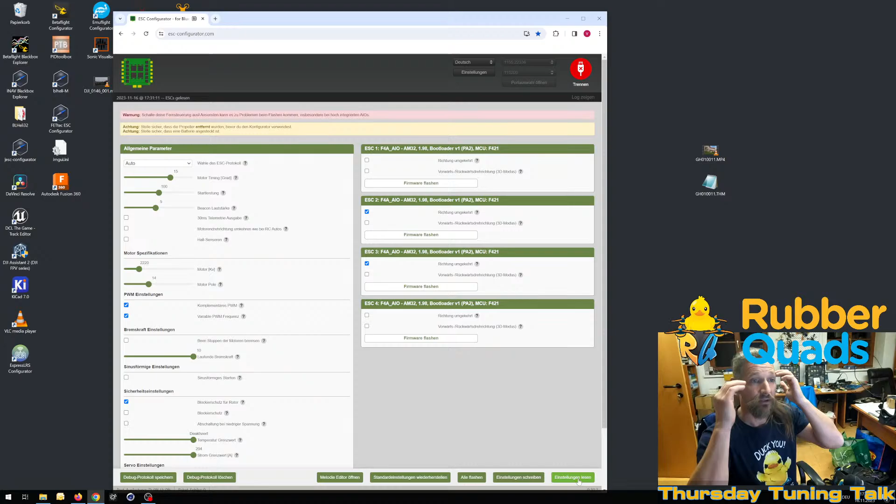I'll do one for BlueJay as well. So, it's a bit behind, but it's working. So, never change a running system. Okay.

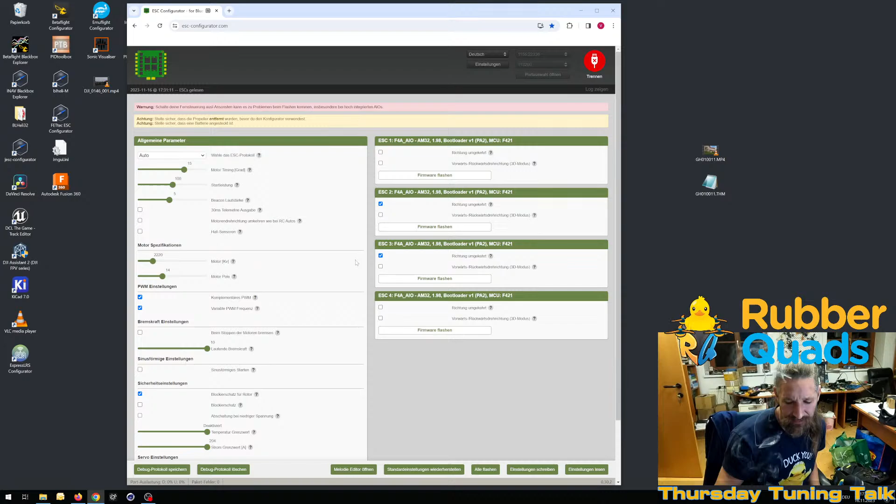Chris, since you're here, can I change the language on the fly? Because it's German. It's obviously reading my system language, and no one wants German parameters, and I don't want to mistranslate. If Chris is still here, yeah, he is. Guide me. Oh, over here. Sorry, I'm blind. Missing the obvious. So it's English. Okay.

So what do we have here? We just do a quick run over ESC protocol. We all use DShot. We could nail it to DShot, but we don't have to. It's so fast to init the DShot. Timing advance. First and foremost, this is how much earlier. No, later. Chris, timing advance is later, as far as I'm aware. Okay. No one knows better.

But I think with cars, the ignition timing is going to the negative if it's an advance, and it's going to the positive if it's a delay. Chris, please enlighten me. Because Style Sucks is in the chat, he did it. Wrong at once. Yeah, but I say it's a pity we don't have Alka or Daniel here. They certainly know better than we all do, because higher timing would mean we're powering the coils earlier.

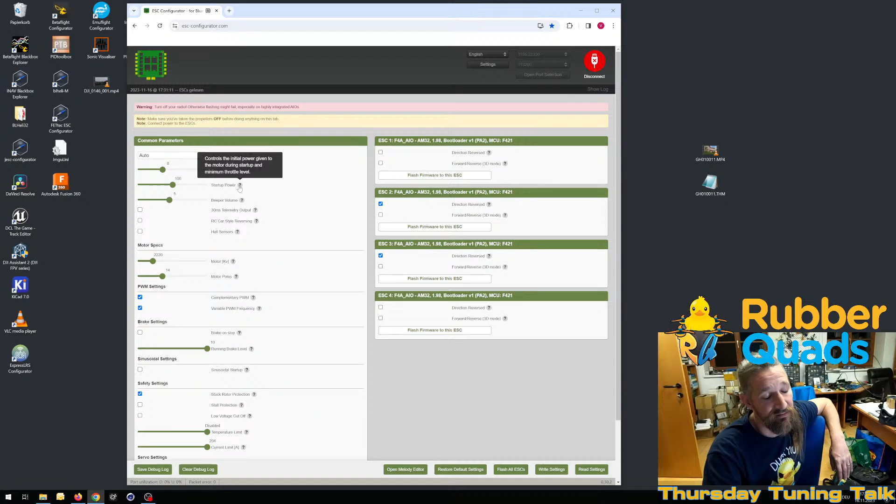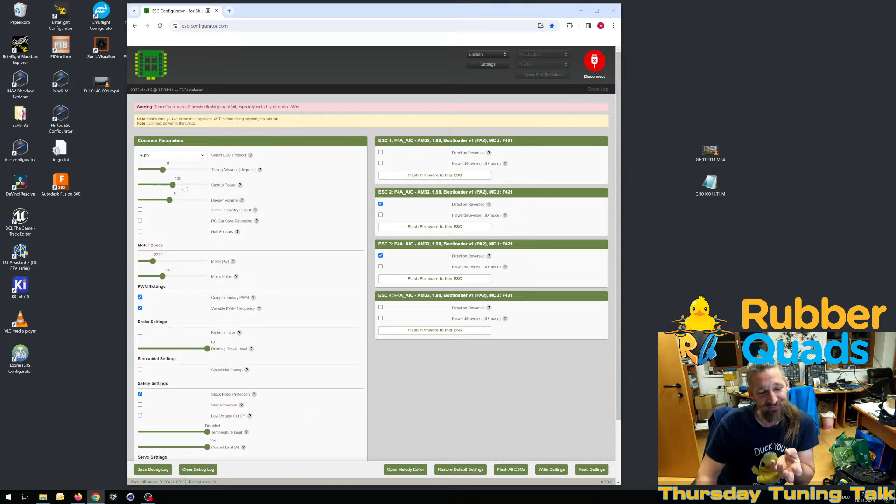So startup power is usually enough unless your motors have a problem when arming, getting revving first, or if you fly against the wind. So in a stall situation, the wind is actively braking your props, braking in the sense of slowing down your props. But with dynamic idle, we usually don't get in the range of startup. So it's basically when you arm and the motors don't spin immediately or start twitching around, you need more startup power. So it's mostly needed on whoops, which never ever come with an AM32 ESC. But I'll show you the setting anyhow. Oh, okay. I have an O3 here, so let's be quick.

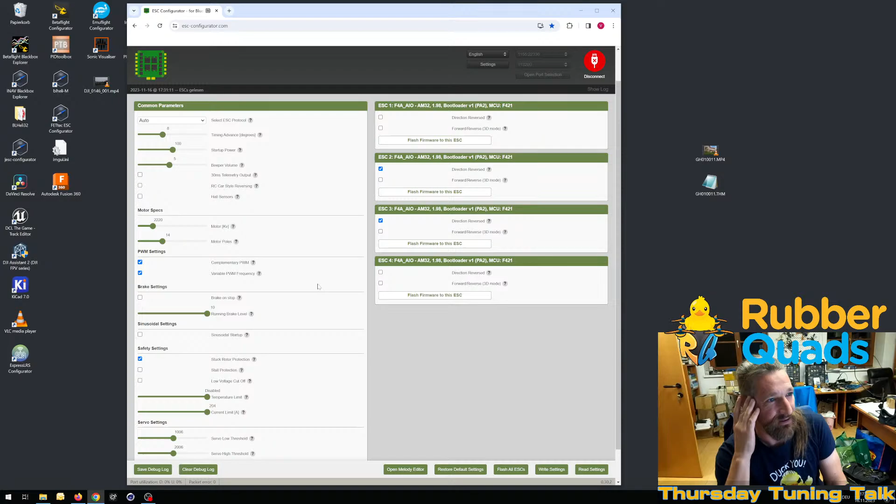Motor KV and poles are used only by AM32, which allows it to adapt the ramp up power to the speed that is expected from the motor. So the ESC knows the voltage and it knows how fast this motor can spin. So it gets an idea at which range it needs to apply lower power to allow it to gracefully spin up.

Complementary PWM is always on. We need to power down the props as fast as we rev them up. So without this, your motor would be essentially freewheeling when you get off the throttle, and it would take forever to spin down, and your PID loop will just spool up because it can't brake fast enough.

Variable PWM. It's a topic all of itself. If it works, fine. If it doesn't work, take static PWM. We gain a little at higher RPM by going higher with the PWM rate. So what we're doing is, since we have FETs that we can only turn on and off, to apply 50% power, we turn them on, off, on, off, and say it's half of the time on, half of the time off, so we have 50% power. And we do this at the rate of the PWM frequency, which is 16,000 to 128,000 times per second, depending on the ESC.

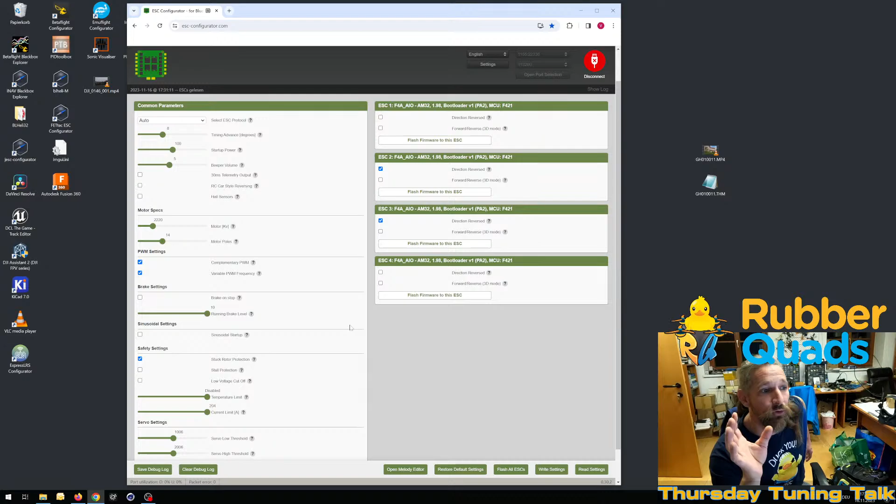So what variable PWM frequency does is at low RPM it uses 24 kilohertz and it ramps up the PWM frequency with the speed of the motor. In some cases you can get electrical interference from the back EMF, which is a divisor of the PWM frequency, and if this hits, let's say, exactly at the gyro frequency, it can make the gyro go crazy.

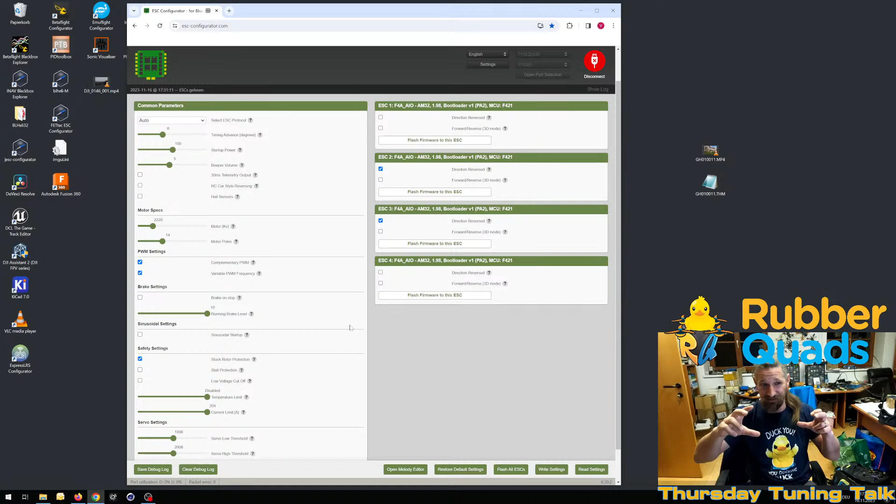I haven't seen a rig where 24K is interfering with the O3. There are some advices to use a higher PWM frequency if you get jello. I didn't have a single build that had this issue, so I can't judge, because we're talking about 24 to 96,000 cycles per second versus 50, 60, 100 hertz, which is the sensor's readout from the O3. I would be hard pressed to find it.

Usually it's just a tuning issue where you got some system resonance at exactly 30 or 60 hertz, which would hit the image refresh rate of the O3, if it's that sensitive to it. And there are better ways to tune it on the Betaflight side than giving up torque.

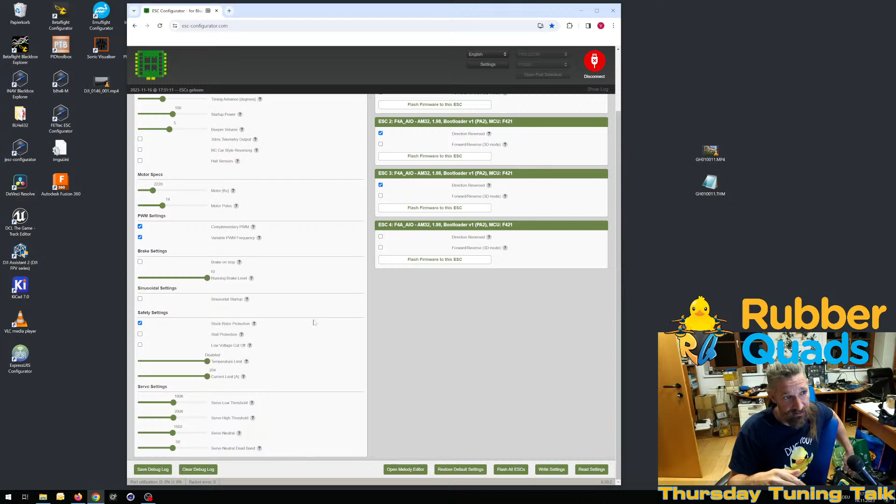So variable PWM will have the high PWM frequency dictated by the motor revs, and the low frequency when you get off throttle will always stay at the lower end. So if you're off throttle, you will always have perfect braking. If you're on throttle, you might gain a little bit of efficiency, especially for whoops.

What's next? Running brake, as much as you can get. You want braking power as much as you want acceleration power.

Sinusoidal startup. This is just for startup, especially on big motors. You won't power the phase with the full throttle value. On startup you will have lower duty cycle, in the center you have the full duty cycle, and then ramp down the duty cycle again. It gives a smoother startup of the motors, which helps. But there we talk about 10-inch plus, where this really makes sense.

It sounds really nice. FETtec is doing this, and the startup sounds like ramping up some sci-fi movie contraption, but it doesn't make a difference, honestly.

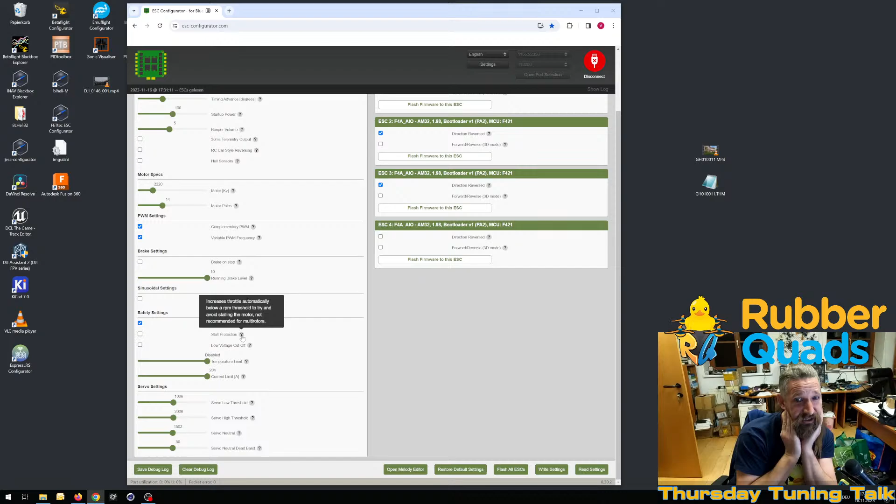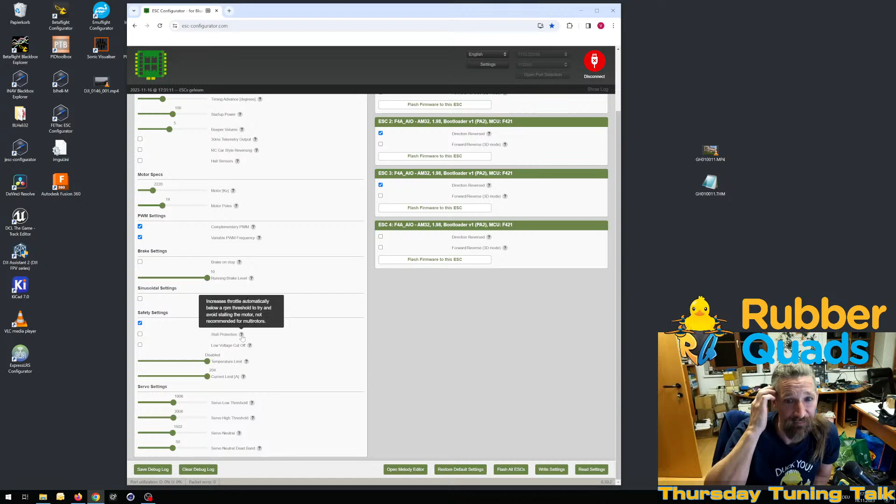Stall protection. I don't know if we really need this. I will ask about it, because I'm not sure in which RPM range those systems are active. Because with RPM filtering and dynamic idle, Betaflight itself will make sure your props don't stall. A stall is when the props come to a standstill, so it needs to rev up from 0, which might be a problem mid-air because it takes some time.

Yeah, it will give you more torque down low if you turn this off, but you shouldn't be in a region where this is even active. So if you set your min RPM to something fitting your prop size, then you shouldn't run into this.

Low voltage cutoff. Yeah, I'd rather fly home with a dead battery or kill the battery in the process than have the ESC turn off, because the ESCs won't turn off all at the same time. If each ESC has a voltage sensor, they won't be calibrated to the millivolt the same, and this difference would just make one corner cut power before the other corner.

So I'd rather kill a battery than not going home. It's more for cars, yeah. But for cars now, Iridium Master put out an Express LRS controller for cars, so you can get voltage telemetry. And that's a good point. So I'm 90% talking about multi-rotors and not cars.

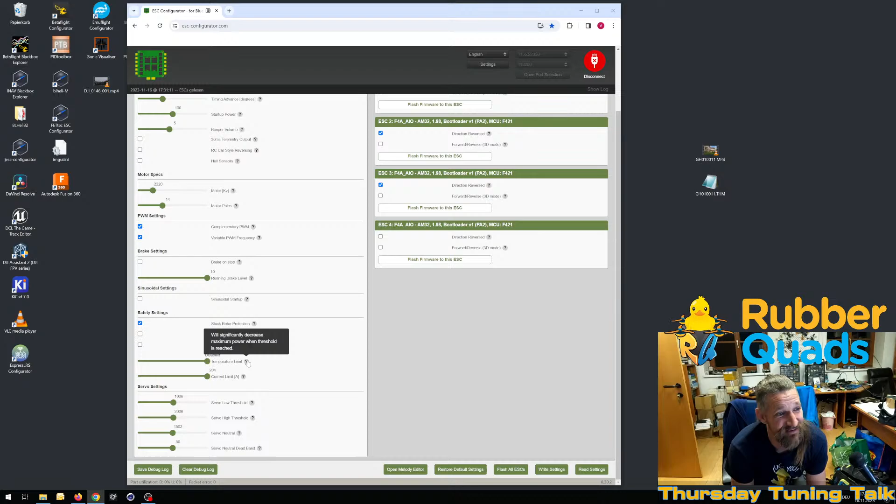Temperature limit. It's a double-edged sword, I would say. Be aware that this is the temperature of the MCU, and the MCU gets hot way later than the FETs get, and the regions they should be able to work in are similar. So the FET is at like 120 degrees Celsius, and the MCU is at 100, 110 degrees Celsius, depending. There are MCUs that are pretty sensitive to overheating, but they won't build any more ESCs with those. I think there are 3 or 4 models with this MCU that got the temperature problem where the back EMF detection doesn't work because the CPU is over temp, and this is happening already at 80 degrees.

Current limit, fine if you have a current sensor for every ESC, otherwise it won't help. And servo settings we won't need.

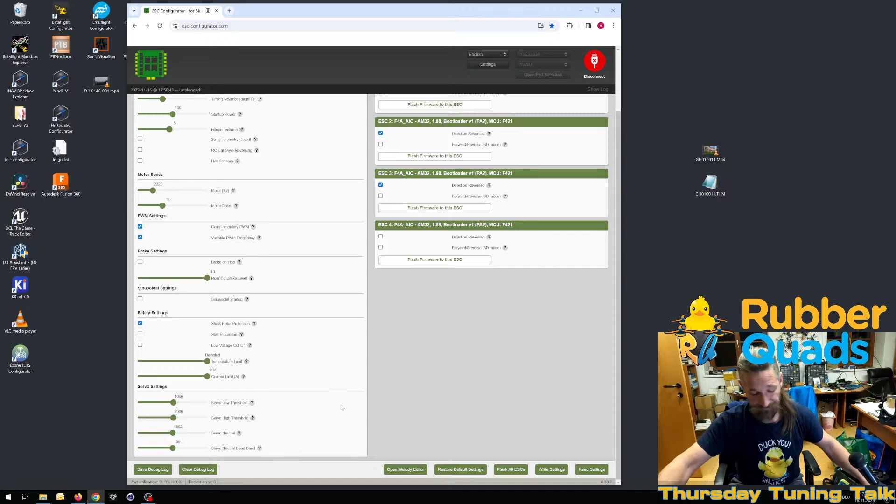Now let me get a whoop. I could have powered this off all the time. Just now unplugging the AM32. Let's have a quick look at what a whoop ESC does. I'll take the analog build. It's less prone to overheating than the HD build. It's a micro USB. Here you go. Cable out. Nice thing, we can stay within. Yeah, props off for the win. And reload.

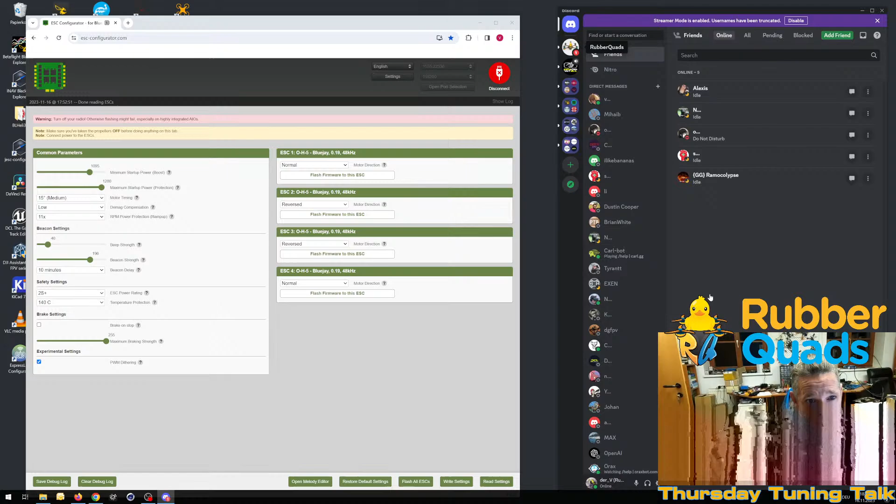Yeah, how to see desync in a log. It's quite clear. You will have 100% motor output at the motor, and it will not change its rotation accordingly. That means DShot is asking for power, and the ESC says no, nah, can't give any more.

Yeah, I also had this. Brandon, I just read your comment on the log. No. Brent from America is calling. I will call him back another time.

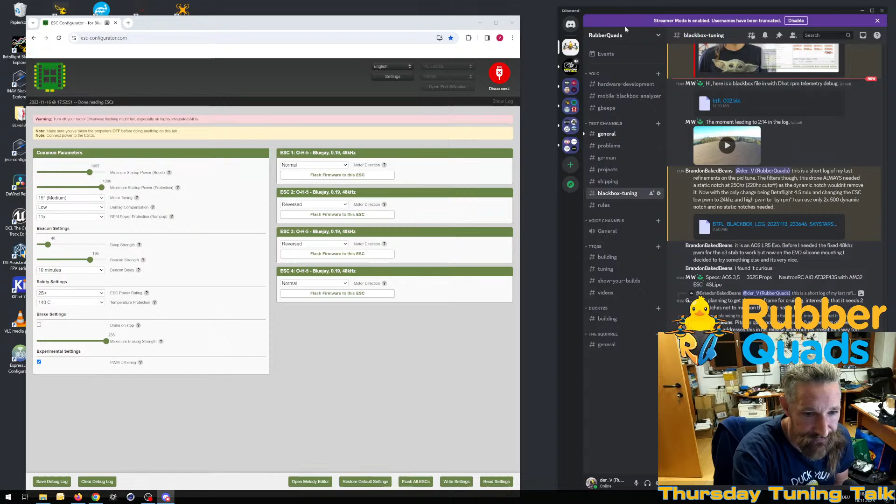Let's think if there are any BLHeli_32 settings that are still relevant and not covered in what we got so far. Right. Do I get that? BL32. Ramp up power, temp protection, low RPM power protection, sine mode, yeah. Who wants it? Maximum acceleration is at maximum.

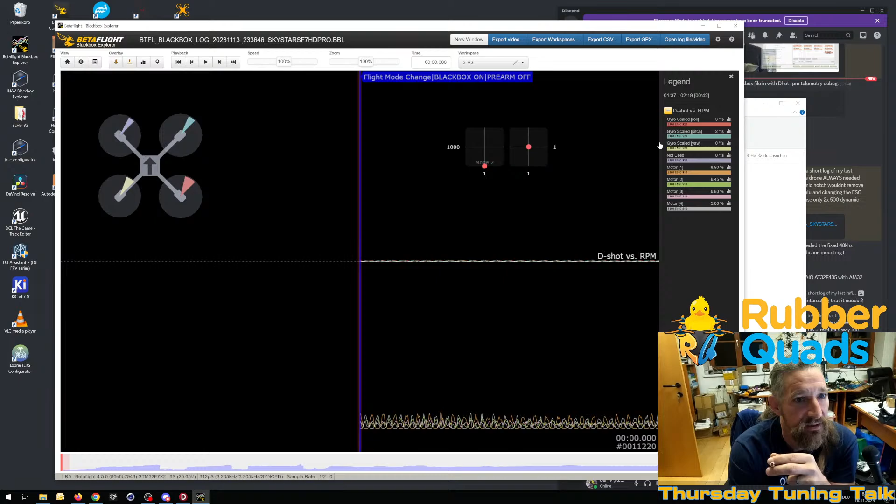Throttle calibration, beacon. Yeah, we talked about variable PWM, everything else. Yeah, try sine modulation. It sounds nice when it spools up. Let's see. Give me my traces back. Otherwise, yeah, it's my computer being funny again. So here we go. What's in this log? This is the one with the 250, which won't get caught by the notch.

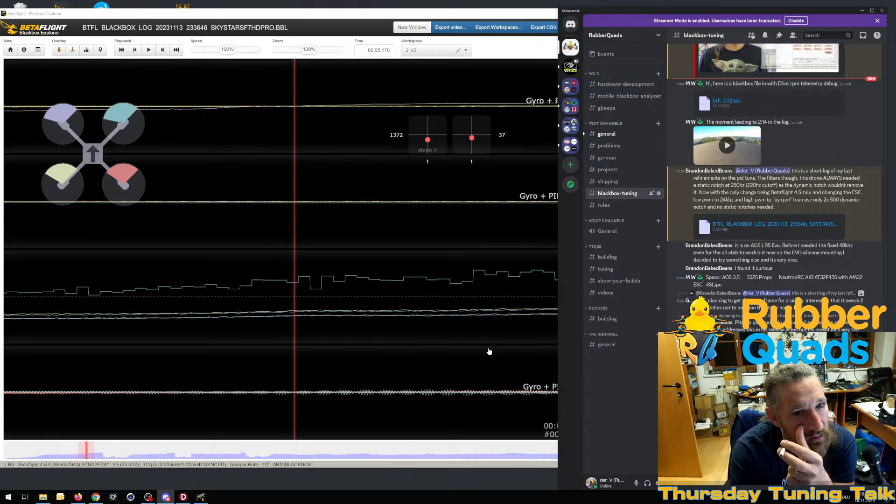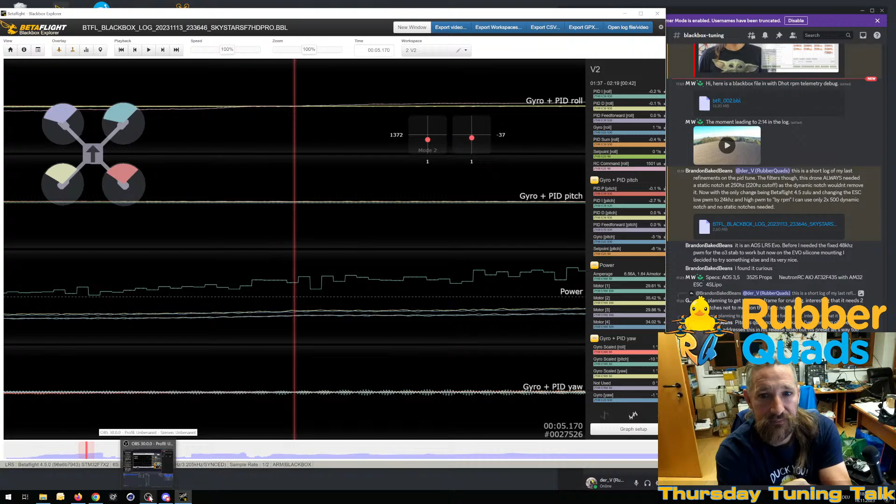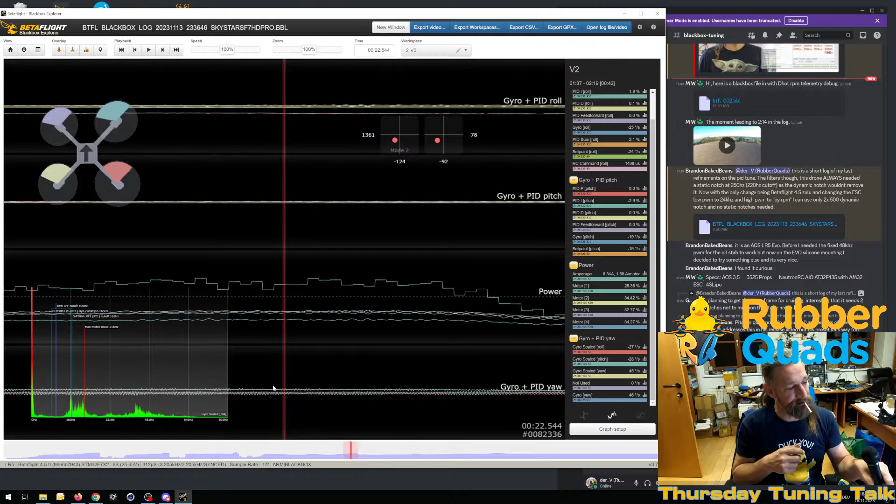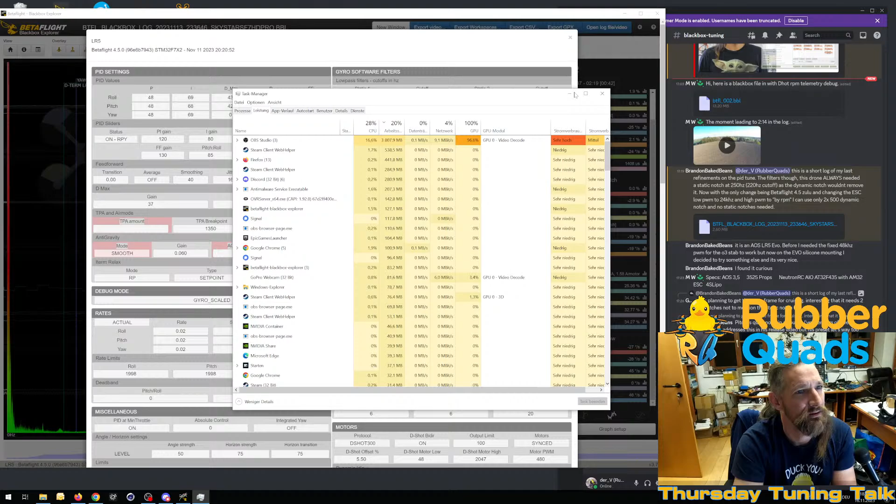Oh, come on. Do I need to threaten you with the task manager? Sometimes Windows starts behaving as soon as you start the task manager to find out what's misbehaving. Yeah, I got 28% CPU and sorted by CPU, everything is zero. Yeah, it's OBS, okay. Okay. Now that's BrandonBakedBeans, is the same rig.

Yeah, having too many dynamic notches. If you have more dynamic notches than resonant peaks, the notch that is left over erratically jumps around, and it offsets your gyro traces by the delay of that one notch that jumps around, because they usually move pretty slow. So we have, yeah, this is that resonance.

One request to all of you: if you fly with taking a log in the back of your head, spend 20 seconds on doing your tuning moves. Throttle ramp, throttle pumps, snap moves on roll, snap moves on pitch, yaw around a bit to see if it stays smooth while yawing, and fly into prop wash once.

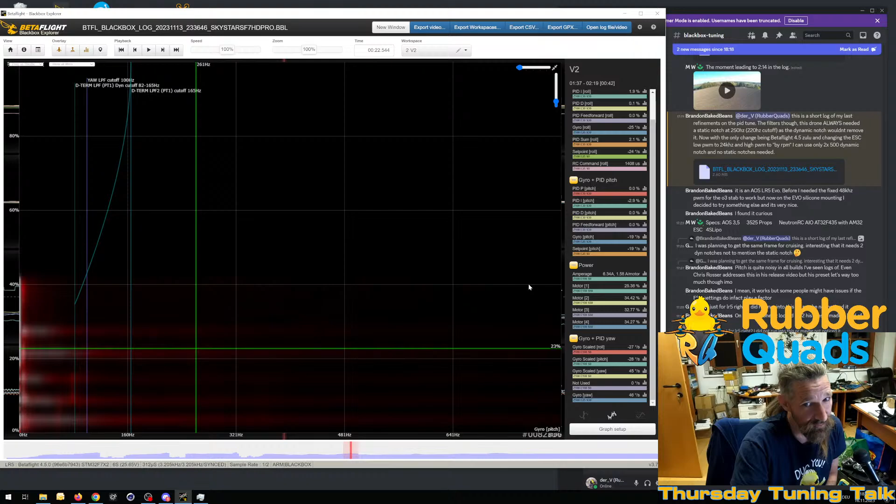This comes into play when you move up your D term, which is way too low. Because there's the clean gyro signal. Because you don't need to filter D term for the motor harmonics anymore if the notches work. You just check once in the filter traces if there's any trace of the RPM harmonics. If yes, you might have set the poles wrong, but

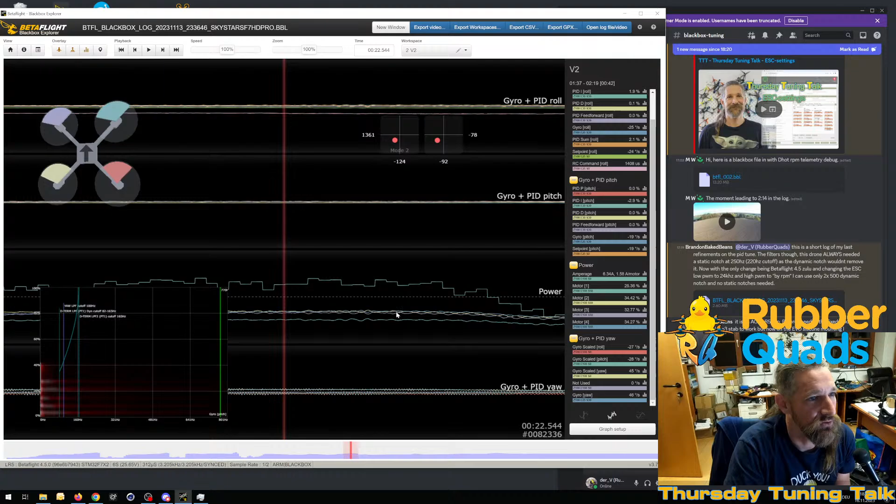While the other one loads, let's see if I got any step moves in here. Yeah. No, you got a little overshoot, but nothing bad. I would run a bit more D-term on the rig. Not that much, but you still have some leeway if you check at the start. No, I'm at the end.

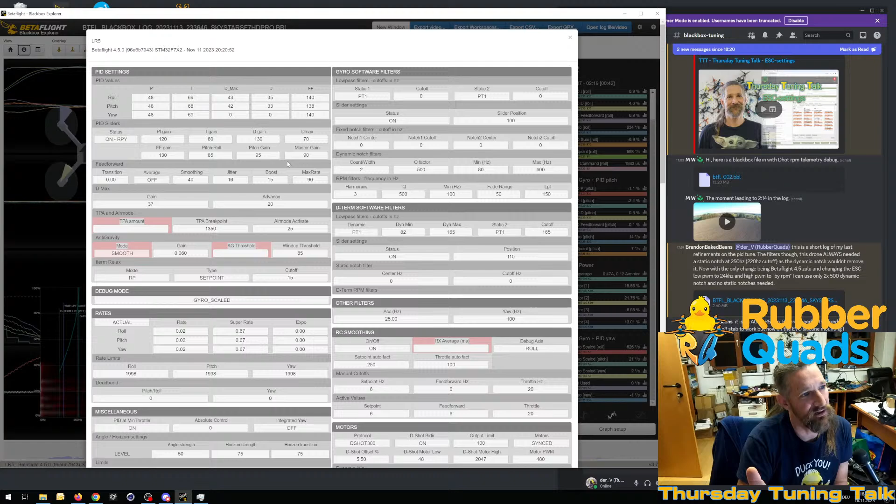So when breaking down from the snap roll, you're only using 20% throttle, so a bit more P-term and quite more master multiplier, I would say like 0.2 more. Yeah, it's quite conservative for 5-inch, unless you got problems from your high D gains. Looks reasonable. I prefer to leave my sliders closer to the center and work with the master multiplier than having all the sliders up.

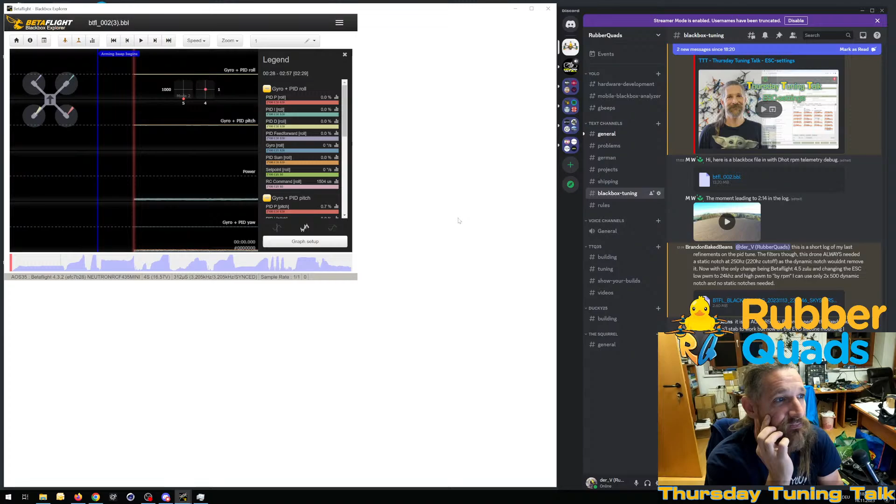Okay. Did it load the other log? Nah, it's still waiting. Here it comes. 2:14 in the log, so we can probably show a desync event. Let's fast forward. Hui! I'm not sure if you crashed into something. Okay. Smooth flight. Pulling out. And D-term goes crazy.

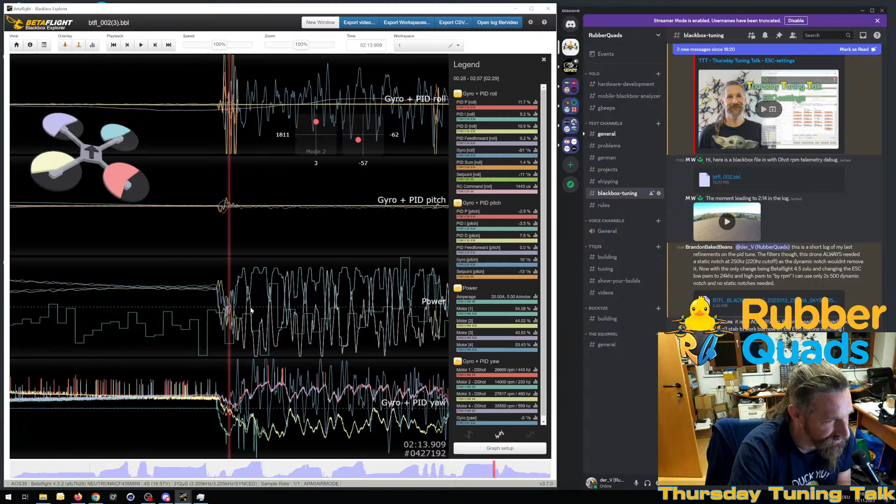Let's look at the motors here. Okay, it starts with motor 2. Motor 2 was probably desyncing. No, it should spike up when it's desyncing. And it can't get... Oh, that takes forever. Did it get back to sync? That is long. Yeah, I think here we're good again. Pooh, 1 second. You were obviously high in the air when this happened.

Yeah, it's alternating between... Nope. Oh, gyro. Yeah, ignore the blue line in here. Wait, let me just get rid of the gyro line. Okay. Okay, starts with motor 2, front right is desyncing. It's out. It's revving up again. Probably putting too much power in. Desyncing again.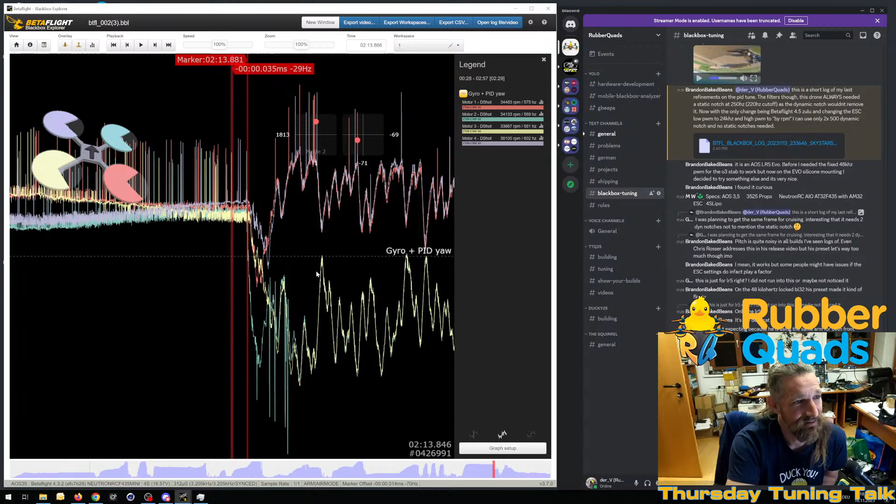If they are worn out as hell and you smoked the enamel of the windings already a bit, you can smell this. Might be easiest to just get a new motor, but it happens so out of the blue. How much D-term do you run on this? Standard settings, bit more feed forward, bit more P. RPM filtering active. I strongly advise against running the bi-directional DShot like that, but this is not the problem of this rig.

So yeah, higher motor timing. Try the next step, and to bring this out, normally you would do snap moves, snap flips, snap rolls. Fly high up so you're sure it might recover. And try with higher motor timing.

Let's check your one dynamic notch. Just to... Oh, come on, why is this so slow? Martin, what prop are you swinging? And what's the kV of the motor and what battery voltage are you running on it?

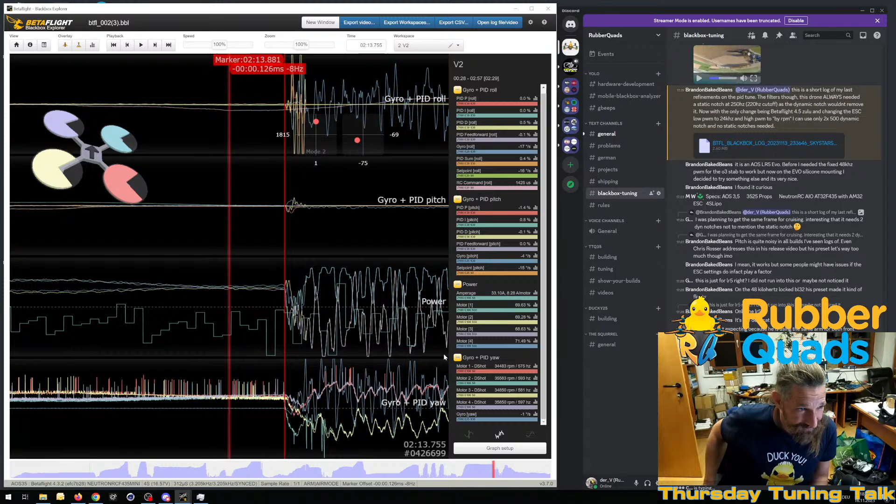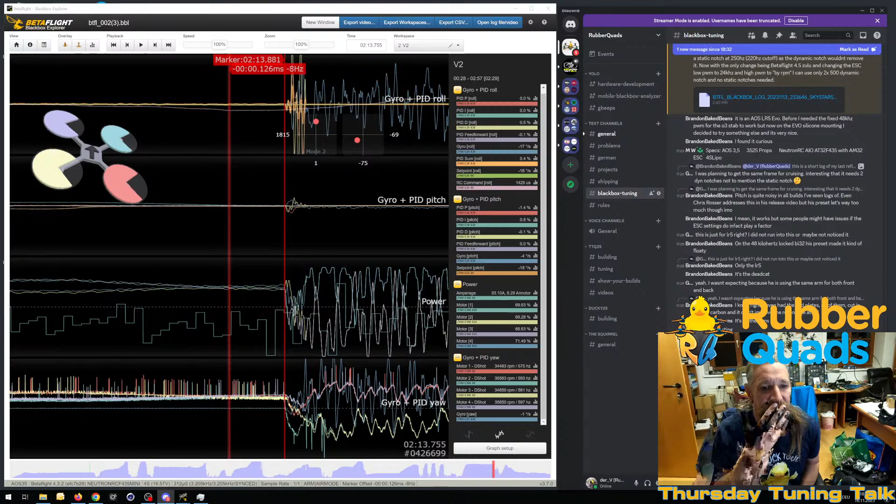There's no... Yeah, there's obviously, because he's logging the ERPM, so there's no gyro scaled in it. Look at the raw gyro traces. We can just peek into D-term and see what makes it into D-term. Okay, wait. Brandon, I'll try to open your other log. Yeah, we know this is working.

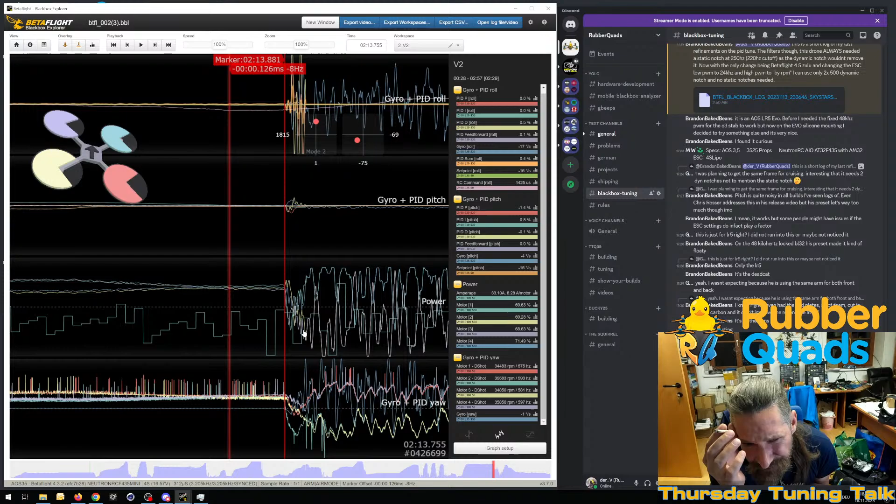Mm. Oh, 2, 3. 1507. Martin, can you put a picture of the motor? I'm not sure if it's the one with the tight air gap or is it? No, it's the 1406.

It's like a 1406 from T-Motor, and it's really, really notchy. It's like tuck tuck tuck tuck. And usually on a notchier motor, if I have troubles, I need to go to higher timing. But that's the 1408. And I don't have a 1507 from them.

No, the KV on 4S is perfect. You could go a little higher if you want a lot of speed. But

Martin, have you counted the magnets of this motor? I suspect it's a 12 pole motor and not a 14 pole motor. So we have to change this in the motor settings from Betaflight configurator down to 12 if it sits on 14, because usually on a 15 stator there's not enough place for 14 poles or for 12 windings. It's just 9 windings.

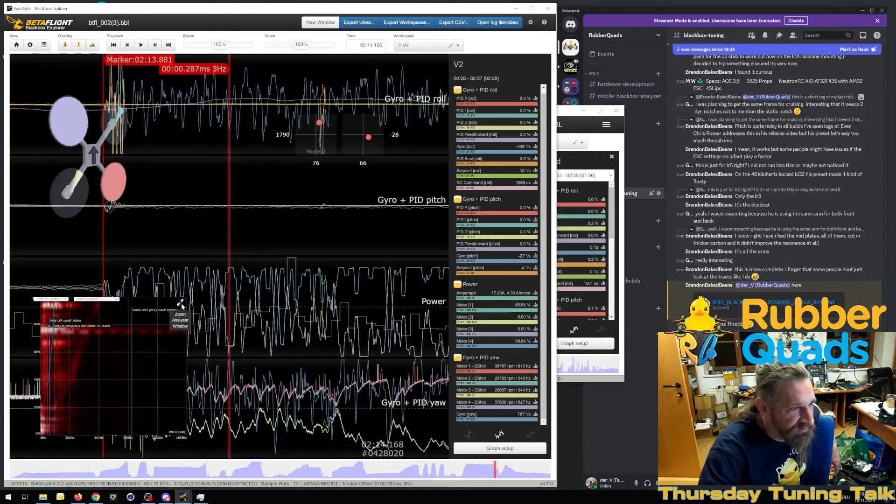So count your magnets on the bell. Just mark the first one with a Sharpie if you have a problem, and run through it and count them. Because from the D term trace, you can clearly see the first motor harmonic, and RPM filters should crush them down, it's a fast log, down to 150 in the standard settings.

Let's see. In the motor settings, no, doesn't tell.

Yeah, Martin, make sure you got the pole count right. It looks suspicious, and you see, you have really the strongest filter you can apply on D term, and it still can't get rid of the first harmonic. So either your RPM filtering is set wrong, or you just didn't set the motor poles correctly. The motor has 14 poles, or you set it to 14 poles?

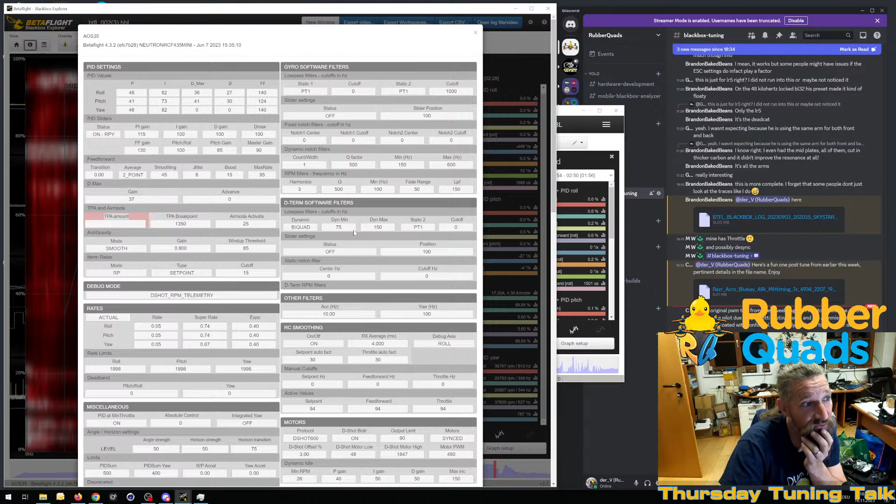Because with the standard settings, there shouldn't be that much of the motor noise in the D visible, and this is with standard gains. Often I see this one. Oh, come on. Oh, I got so much noise. No, you turned the gains up. This might be a resonance at about 170, but it's pretty low for a frame that size.

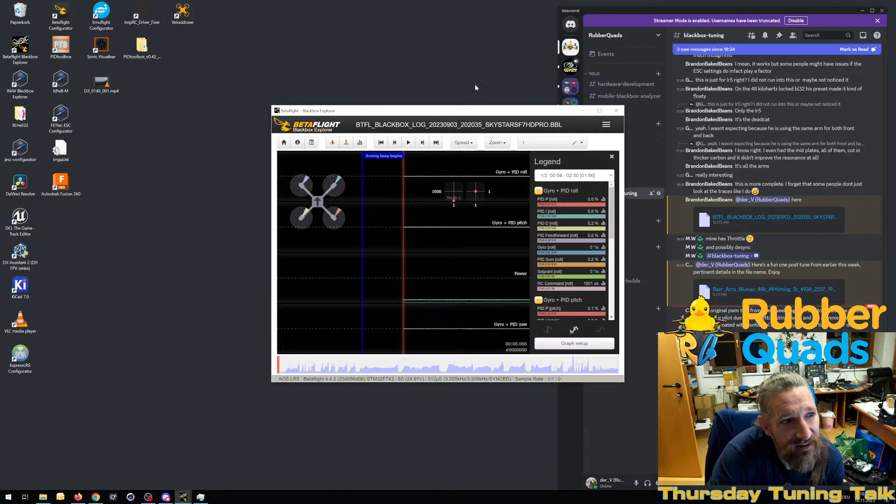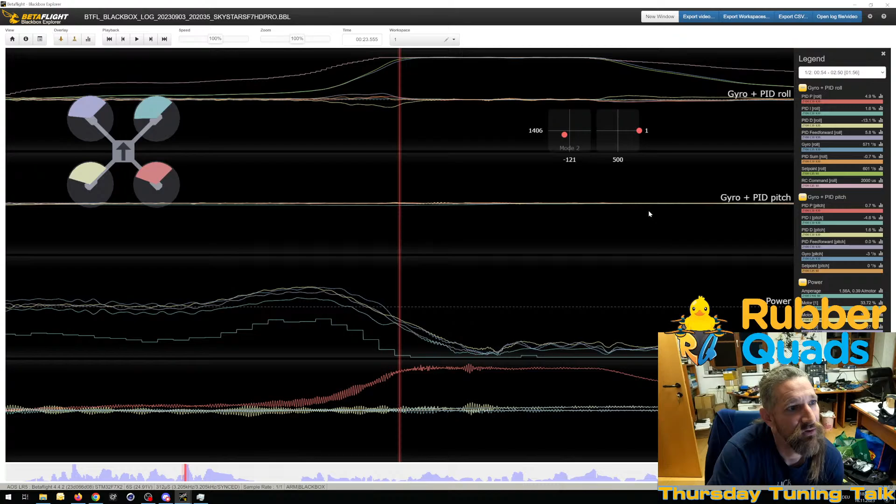Okay. Entertaining. Wait, this is Brandon's new log. Ah, this is a nice trace. Let's see the noise in this one. Brandon, this is the one you sent me, the SkyStars F7 HD. I didn't know that T-Motor made a 14 pole that size. It's nice, should run really smooth.

Yeah, sorry, everything takes forever. But I can't turn off OBS for obvious reasons. I should get a second computer. I should use one for streaming. Oh, damn it. Did it turn the gains up, or is this...

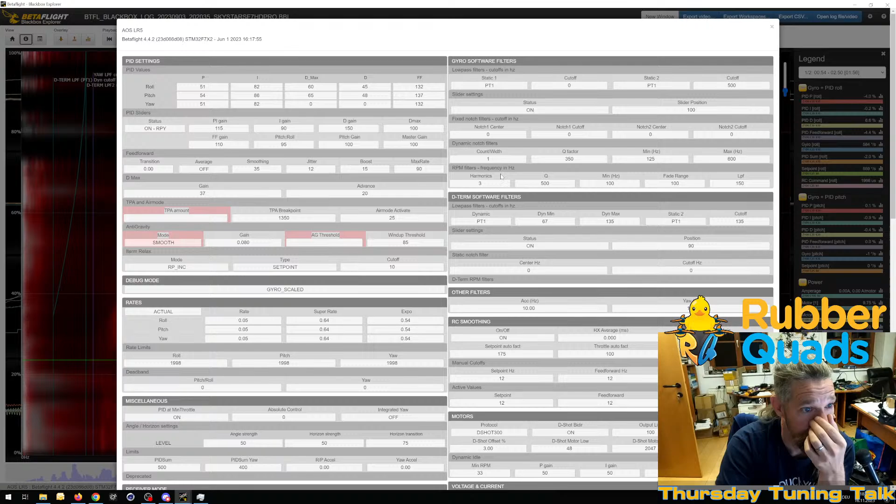No. Wait, did you notch this out manually? The 250 on this one? No. Brandon, why are you using only one dynamic notch when you have two resonance peaks? Oh, on this log I would use three dynamic notches to make sure to catch the one at 160. You got this at 260, and you have here another one at 440. And let's hope the axes match up, but probably they won't.

You don't have to explain. You try it for curiosity. Do it for science, you don't have to reason. What would be fun is if you find out something. Let us all know.

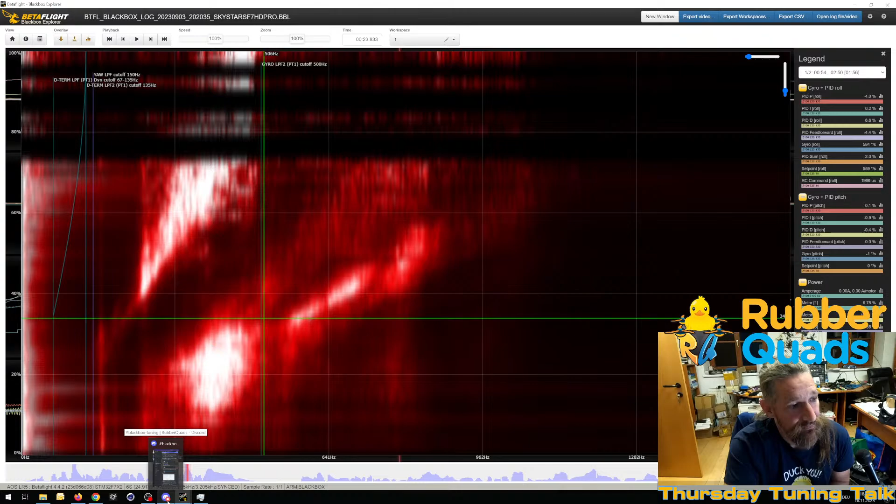Yeah, nice. I gotta get these motors, but currently I ordered custom motors from T-Motor for 3.5 inch, based on the Pacer 1604, which took me by surprise because I had them lying in my closet for half a year because the tubular build needs 12 millimeter mounting, and on my new rig, the Squirrel, I can fit like 9 millimeter mounting. The distance between the screws.

And I approached T-Motor for a proper motor for 3.5 inch, and they say, yeah, we have this and this, and I got this spiel already from RCinPower, and they only wanted me to try what they're already producing, so that's why I run this. What's the dentist called? FPV Cyclist, the dentist. Motors. They are unbranded because they are prototypes from RCinPower, and the 1404s. Those are just too heavy. And the 1404, if you ask some torque from them, they will desync.

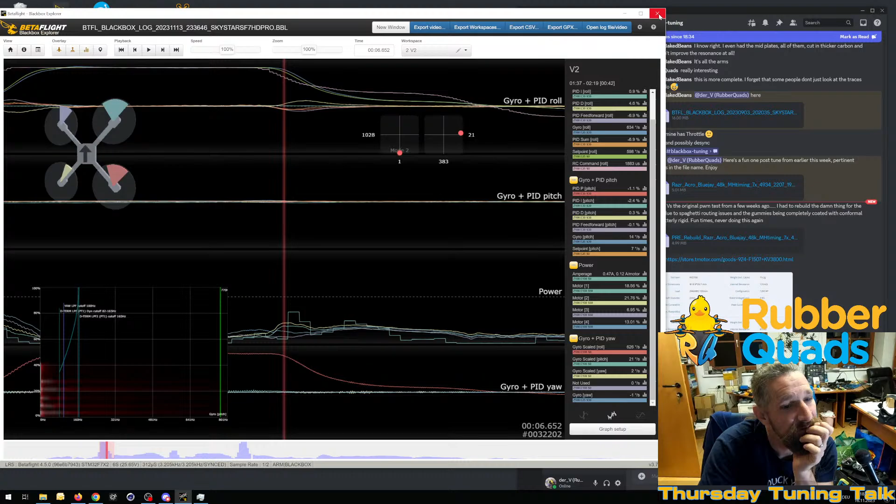Nope, not the one I wanted. Whip out. Yeah, one more log, one more cigarette.

Joe, which frame is it? Can you post a picture? I'm always curious what people come up with. Most of the time slightly disappointed because it's another school bus frame. And you know, I designed different.

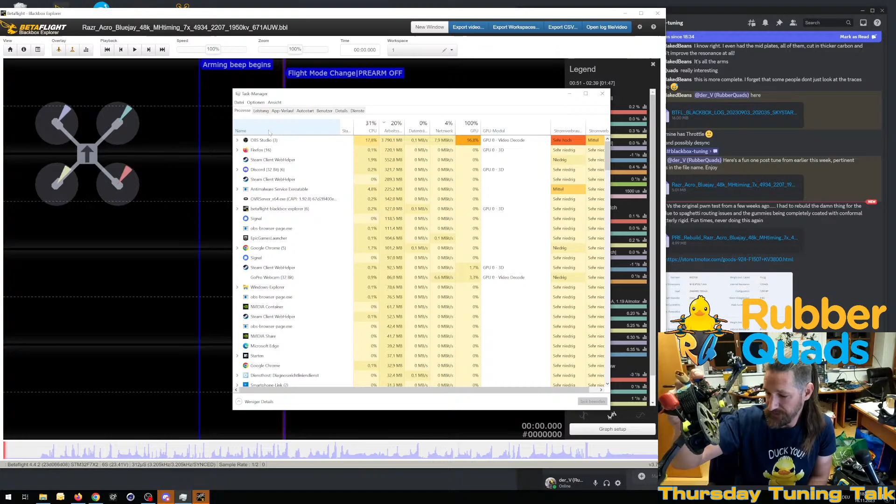I went to a concrete bando, and it was carnage. Me and my son destroyed 4 rigs. I had one of my prototypes. Here it is, I was searching for this for an hour. So I broke an arm over here, but it's just fair because the props were bent beyond recognition. This is the broken off arm and wait, where's the bend in the motor? Here. When you look at it, it's not round anymore. It's so badly dented. So I think it's okay it broke off.

Yeah, but no school bus frame for me. This is where the battery goes, right in the prop line. I had to stiffen it up in the back a bit because the tail was resonating at 120 hertz, so I had to get it higher. But it was full power into concrete, and the O3 survived it. Basically, I just lost the motor and the cap at the back went tumbling down, exploded.

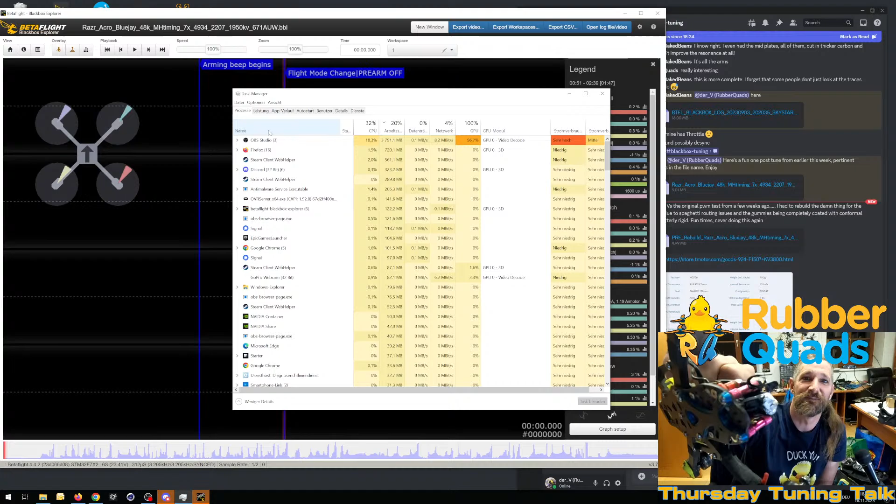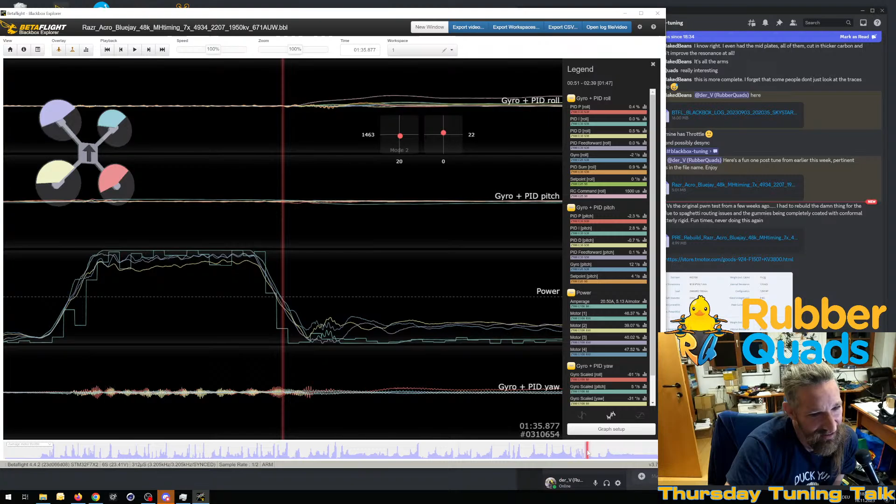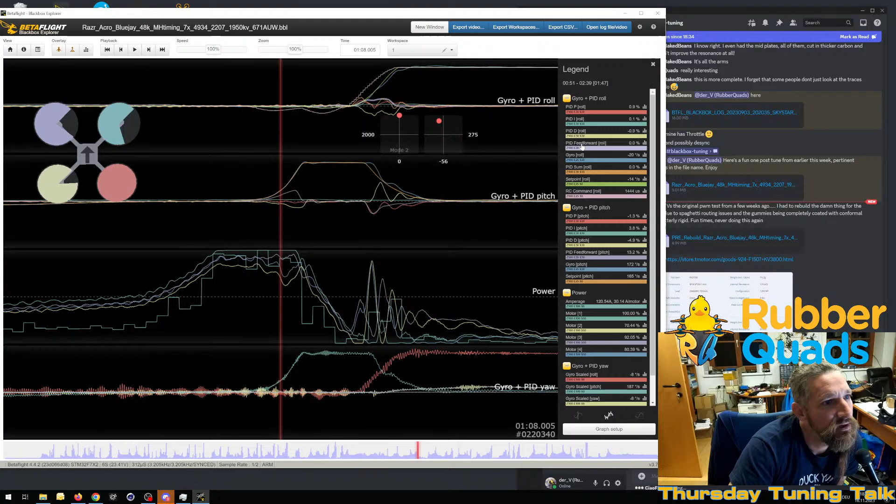Lots of throttle pumping. Oh. Is it desyncing at the end? No, it looks fine. You got a little overshoot. Where's feed forward here? No, that's nice. You're on the edge with your feed forward. Might put it one tick down or half a tick down. It's not the end of the world. But when you see that your P term starts fighting feed forward, then you have too much feed forward.

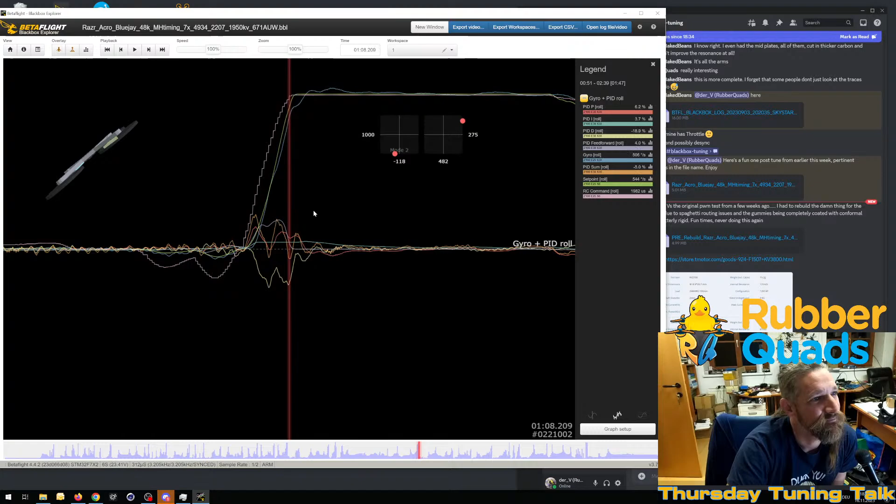The overshoot here is from I-term winding up. So you might suppress I-term a bit more on fast stick inputs. But it's already starting to wind up here. Did you change I-term relax quite a bit? Roll pitch setpoint cut? No. That's a light frame with quite a steep prop, I would suggest. But because the gains aren't that... Oh, you.

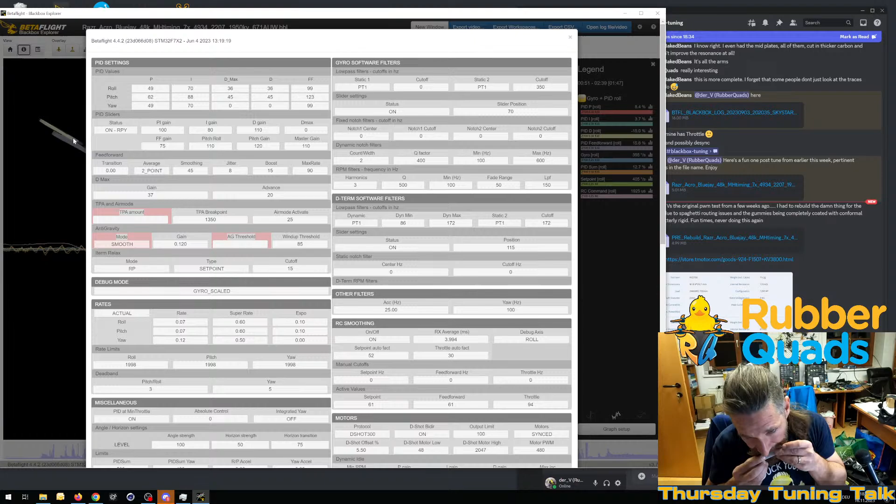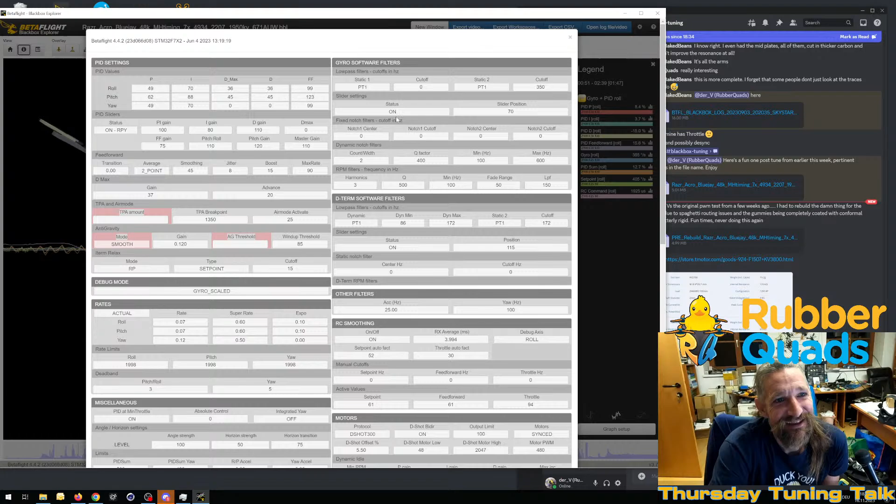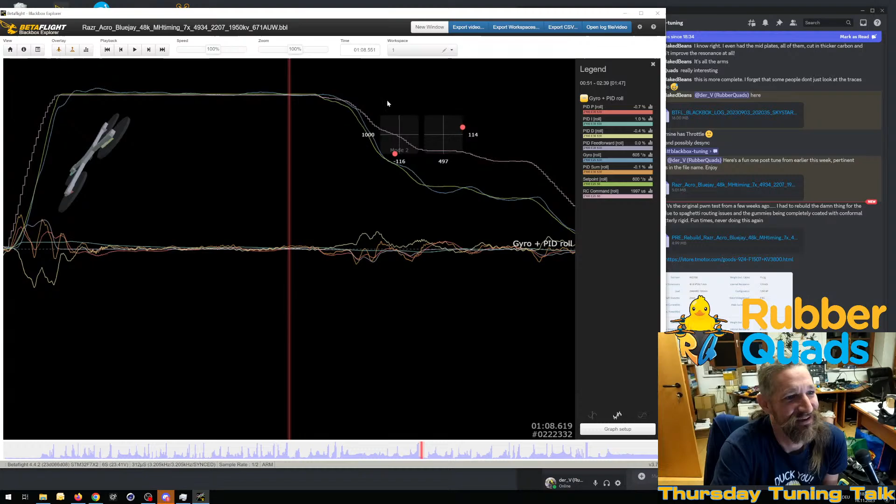Edog, I don't need to remember those. I just look at those for aesthetic reasons. And basically, I want that blue line to follow that green line smoothly, which this one is not. Yeah, I should run a bit more P. Let's see if the filtering is sufficient.

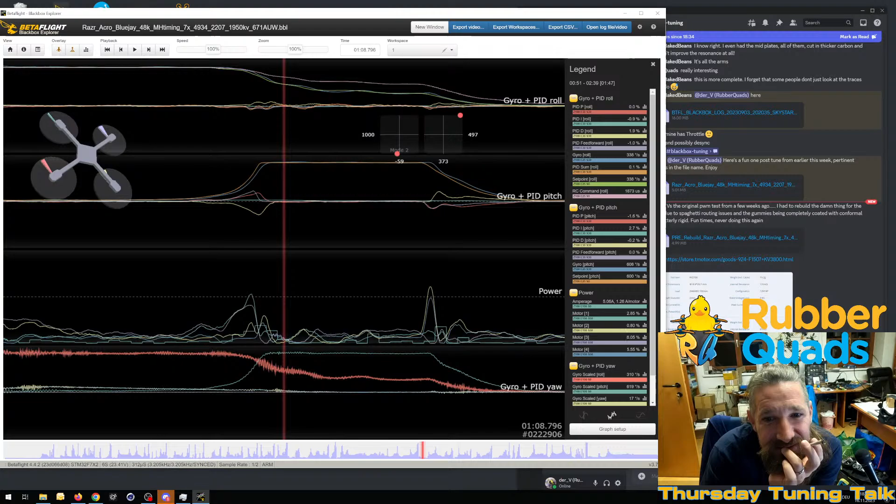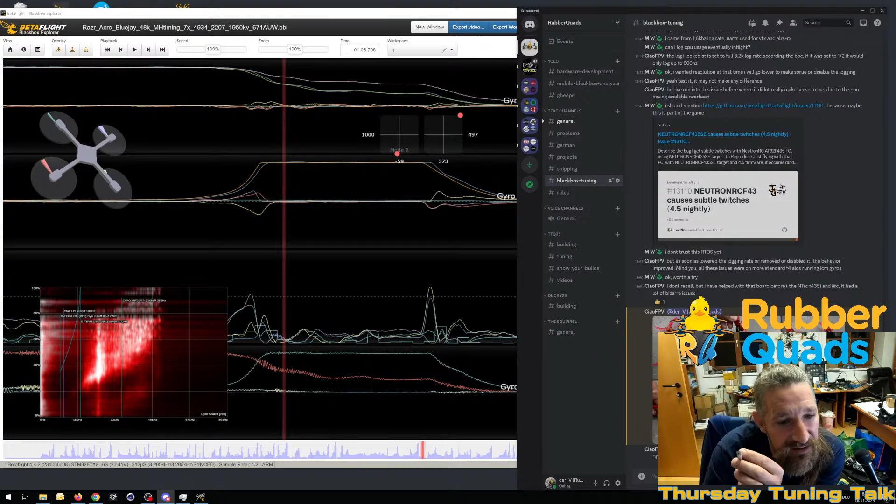Ah, here it is. Sweet. I like the look of it. Oh, it's a two-piece arm design. That's very interesting. But in the corners, is the motor holding together the arms, or is there a pressure plate beneath? Because the TPU is too little to hold the arms together, so they will swing independently from each other when the motor is moving around this axis.

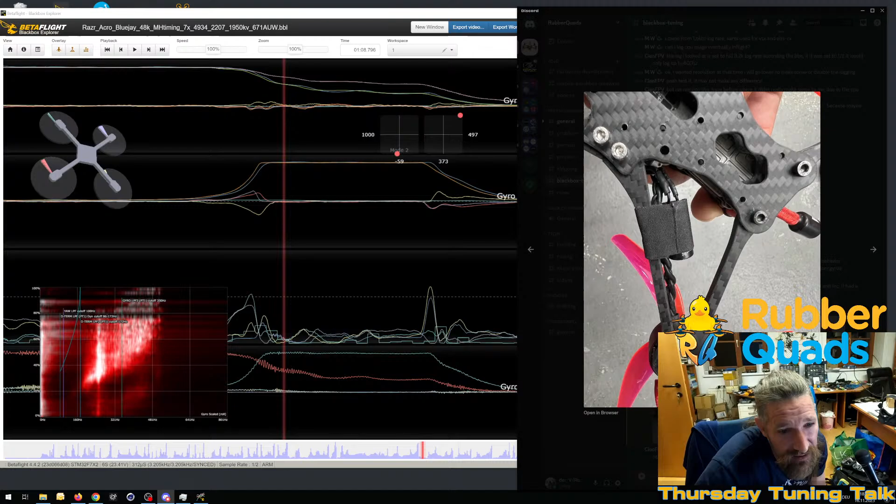How thick are the arms? It's supposed to be a light build, so I guess it's like 5 mil arms. I dig this design, it's really nice. You get a better view on it. Yeah, it got a little curve in to interlock them, but I doubt it's enough to have those two arms reliably connected together and not shear side by side.

The only one harmonic at 250 hertz, it's fine. You're trying to get rid of this with the low pass. Let's see how much makes it through. Sorry for the slow computer. Yeah, this low pass is not cleaning up the noise over here. The RPM filters are working, so you can go up to 800 with the gyro low pass just to get electrical noise, should you have it.

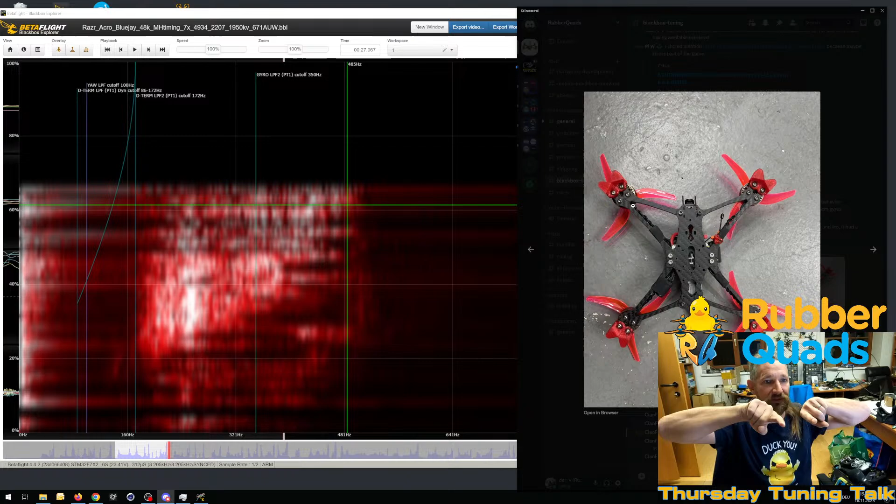Honestly, I would try a pressure plate on top of that link. Simple carbon plate on top of this, just 2 millimeters should be enough to keep this in place, and overcut it. In this seam, make it so that the seam is less than 0 millimeters, so that you have to press both arms together to get the screw into the motor. So you have a bit of bending force on the screws that pushes the plates together, and put a pressure plate on it.

I use this on my destroyed one. Yeah, it was the last flying build, but I use a pressure plate like this on top. I need to have it because it's all just TPU, but this keeps it together. This puts pressure on the TPU to keep this mount in, and I think a 2 mil plate, or whatever the main body plate is made of, because you're not even paying for extra carbon. You have enough space over here.

When you take this carbon plate, they will calculate it on a rectangle like this. So if you put in a pressure plate in here, you don't have to pay extra for it. It's zero money. It's one step when building it, but if it keeps the split arms interlocked, it would make the whole thing way stiffer. And I'm not sure how deep this arm goes in, because the problem is, the arm needs some surface area here where it's sandwiched between the bottom plate and the pressure plate on top.

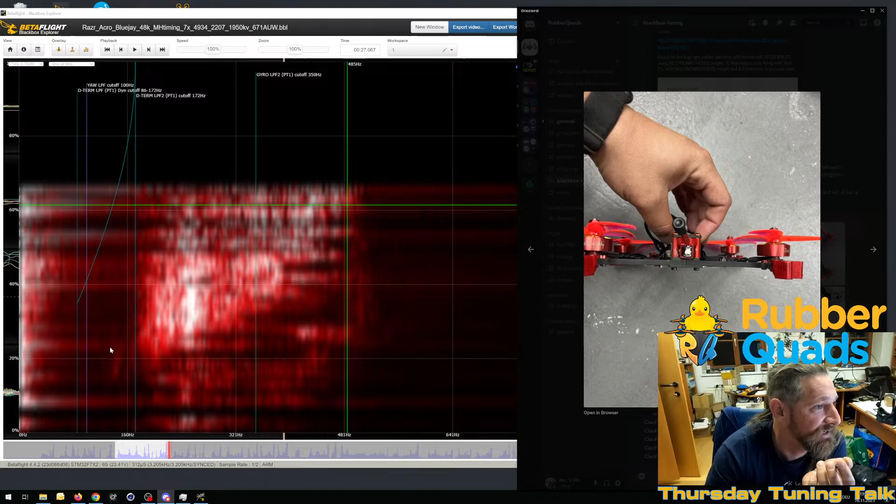Ciao. You won't hear this often from me, but this might be a case where a single biquad or PT2, a static PT2 at 130, and a PT1 at 230 might serve you better in keeping the noise out of your D-term. So you could run more D-term on it.

How's the cap mounted? How much capacitance do you have on the ESCs?

Oh, okay. Which one is the original log disaster? Open is Razr Acro, BlueJay, High Timing, and which one do I have open right now? Because it takes forever. The 5 megabyte one. So this is the small one. Let's see the original disaster for a good laugh at the end.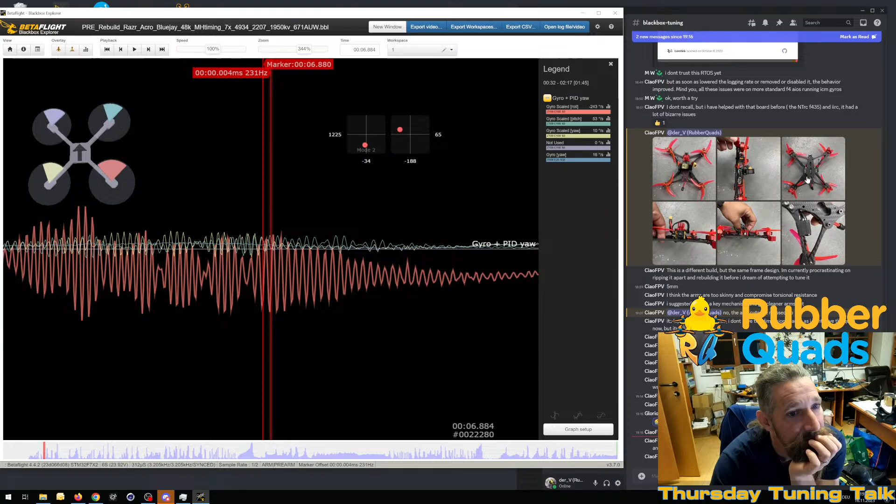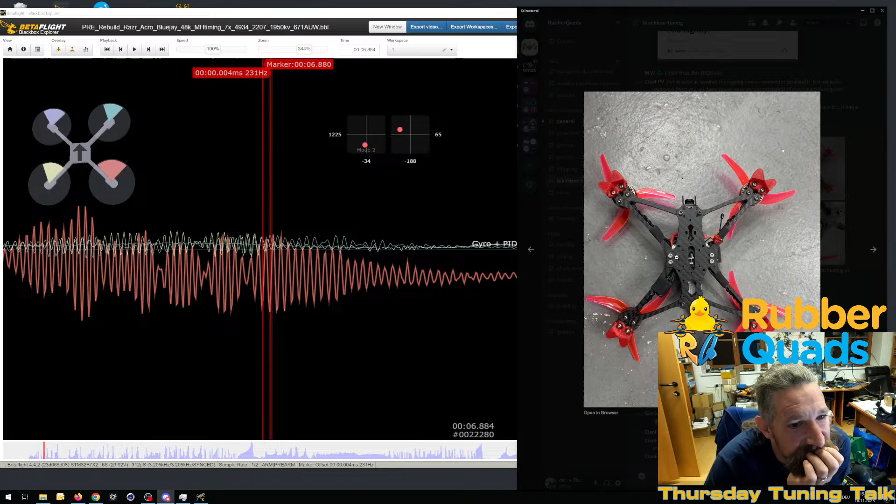Yeah, that's the arms. He clearly needs to make the arms a bit wider at the base. Maybe even, is this stack mounting already? This 20 and 30 stack mounting and 25 in this direction. So he can't get in here with the arms. This is, oh, yeah.

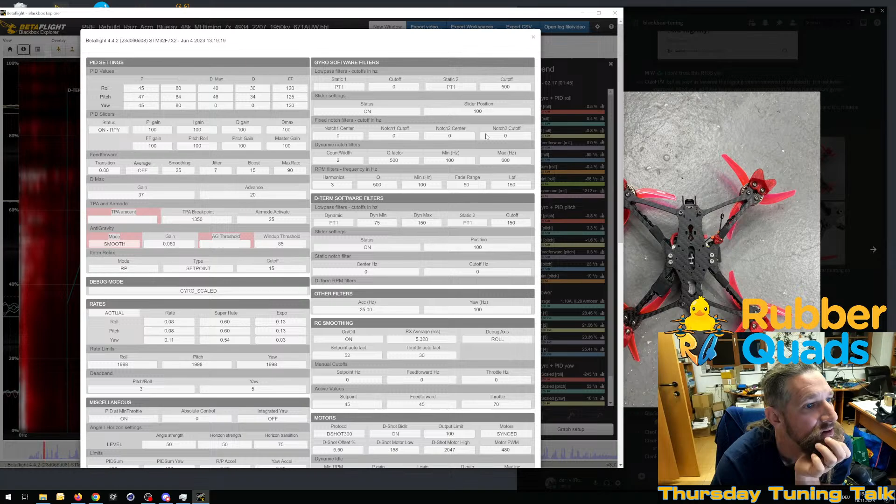Which Betaflight version are you on? Four. Still a lot of noise coming in. Oh, this is just P-term. Oh, this is just because there will be a lot going on.

This rotates like this. Oh, this explains the swelling. Yeah. When this rotates on this axis, it will shift the short arm up and down, and the first harmonic, what you see here. Wait. Come on.

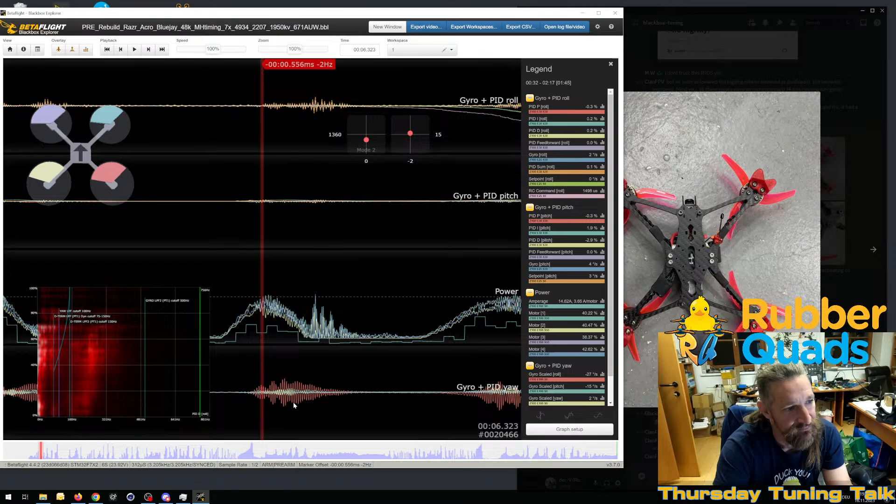So the 250 that you get here, I think I measured it at 250 hertz. Yeah, about 250. This is the arm vibrating with the motor. But what happens is that the vibration is migrated here and here, and now this corner is vibrating with 250, and this is vibrating with 250, and they're not exactly the same. So the difference between those two generates the swelling here.

If you hold it in, you see this swelling, and this can give really nasty artifacts because it's pretty erratic and will shift in frequency by almost a harmonic. So it's like plus minus 50% from peak to peak.

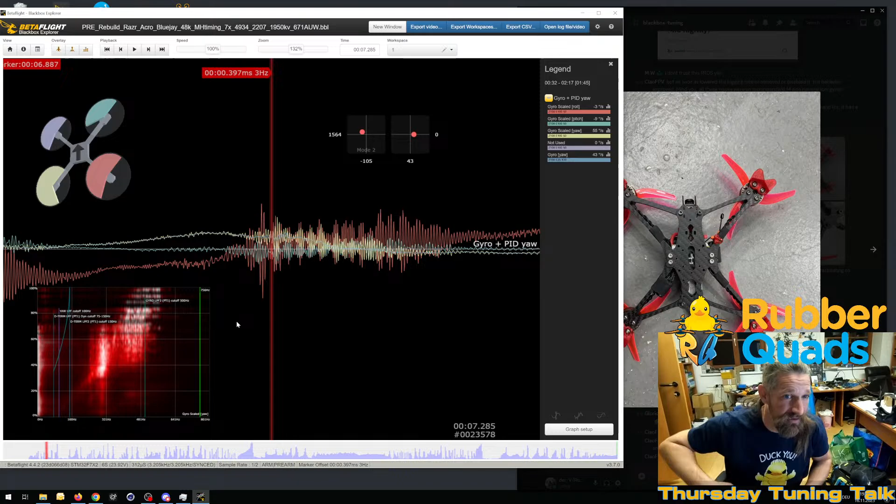So this is the problematic part with a strut structure like this, is that you start to see multiple resonances interacting, and the interacting part generates movement on a frequency that you can't control anymore because it's well in control range.

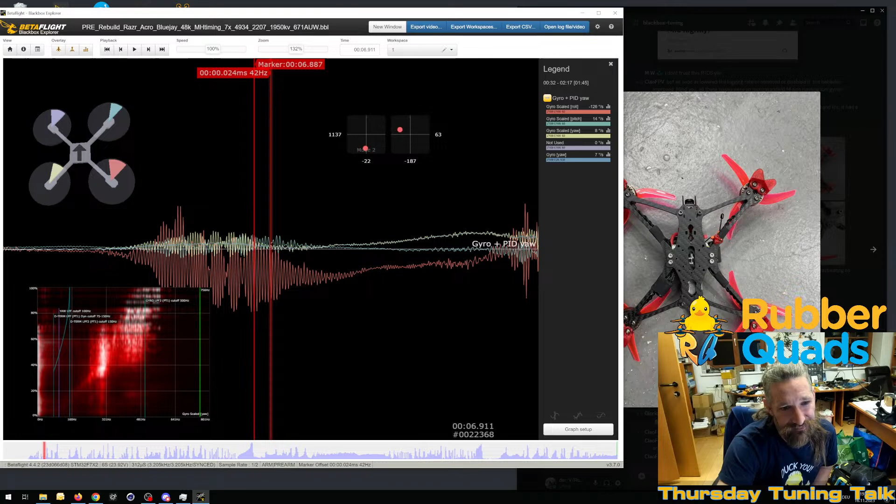So you would react to something that is just a swing caused by 2 or 4 faster swings, and every single one of those up-downs you can easily ignore and filter out, but you can't ignore the hull of those. But he should try just with a pressure plate.

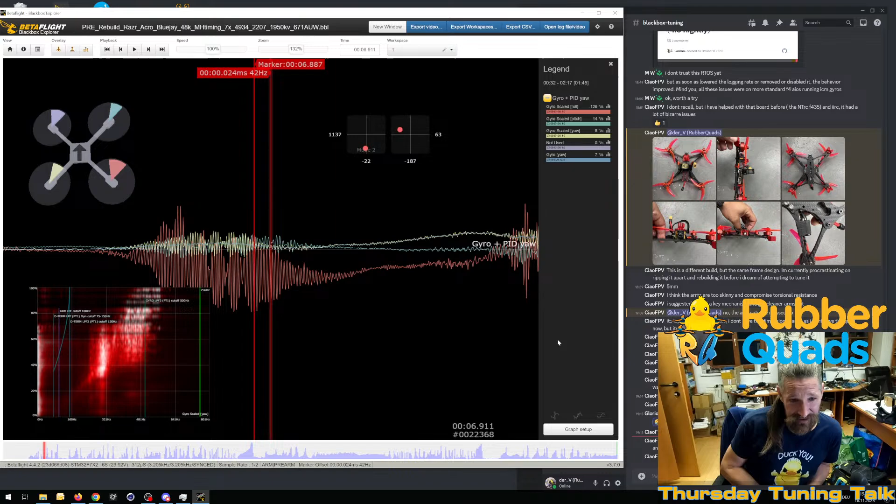Yeah, Clao, where do you get the cap from? Capacitors vary very enormously in internal resistance and in real capacitance. So I actually still have to run those. I bought like 20 different capacitors for 3.5 and 5-inch rigs.

Panasonic FM are usually solid, but it could be burned out. But if it's fresh from the package, it should just work. Yeah, it's hard because no one has the tools around to measure capacitors.